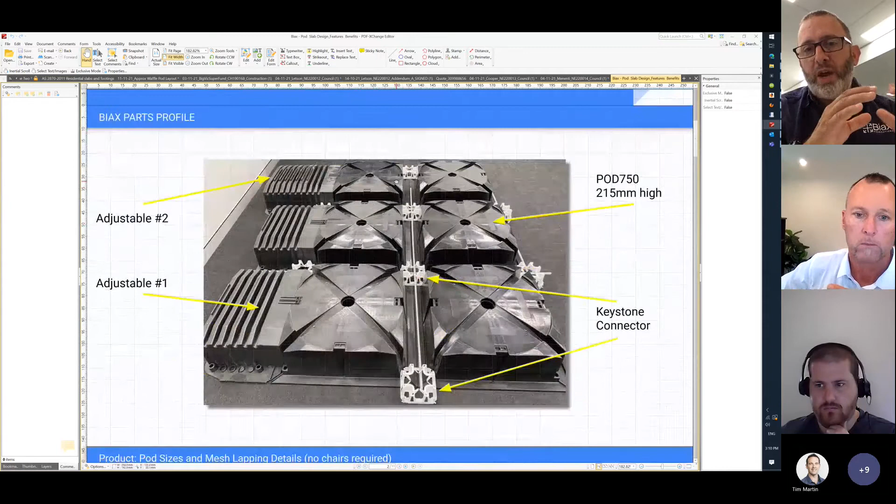That reinforcing profile, unlike waffle pods where we've got to follow a recipe that tells us when you get to here you've got to use these pieces of Rio, because the Biax is designed bespoke every single time with our software, it is absolutely common for an H2 or H2D slab to still use the same Rio that's in our M.

So on that basis, that means H2 will end up cheaper than your waffle alternative. But on your M, you've got more concrete because our rib centres are closer, and we're not getting those concessions of things like rio details coming down. So there is a slight offset there.

So you're saying if you're looking at it purely from a cost perspective, which I'd suggest is the main motivation for the builders on this webinar, that they're going to be looking at a biax on H sites and pods on M sites. Is that what you're saying? Yeah, that's it. So my dialogue with builders is, okay, if your motivation is 100% every individual slab being no more than X amount, then bin the M's, because if you're doing pretty rudimentary M's, this is going to be 7 or 8% dearer.

And Shane, that bears out in the numbers you're looking at. Correct. Yeah, as you rightly pointed out, the ribs are closer together, and the shape of the pod means the ribs are actually about 130 wide on average rather than 110. So it's a more costly unit piece.

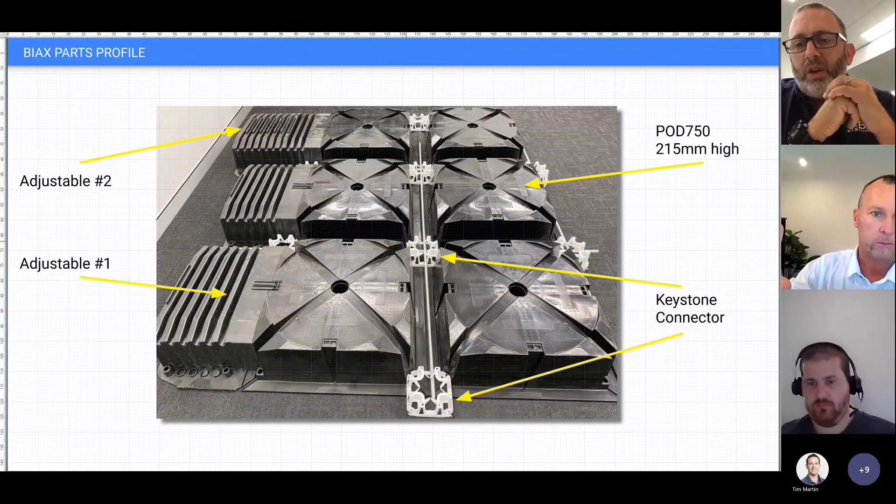It's Lego or IKEA, whatever you want to call it. 16-year-olds could do it, as long as they can read the start point and put the right shape in the right spot. So you're not getting pushback from trades, Jim? No, mate. The two hardest to win over normally are engineers and concreters, and we've won them both over.

In terms of ticking boxes on the other benefit factors, Shane, what we might do is follow the process of the presentation. So those are the parts. If you just go back, these are the primary parts.

We have a pod. We have 2 pods, in fact. This one here is the 215. We also have a 145 mil high for a 70 mil step down for a wet area, a patio, a garage, whatever it might be. On the left-hand side you can see what we're calling adjustables, and the adjustable one clicks onto the pod itself and extends it by 400 mil. The adjustable 2 can take it from 400 out to 700, and then you're back to a full pod denomination.

Those 2 parts will be changed around March, where we get rid of the adjustable one that clicks to the pod, and we'll have a dedicated moulded half pod, or about a third size pod. I won't get into the reasons why, but it will significantly change the experience on site for the concreter, around the complexity of putting these together. It's still incredibly simple in this fashion, but we've made it even better.

The white connector is in the centre. We call that a keystone. The keystone has little prongs, and in the corner of every pod there is a hole. So when you lock that connector into all 4 holes, it pulls all the pods together. Your ribs are identical in size every single time, and it's all part of the proprietary method of keeping this whole thing locked together.

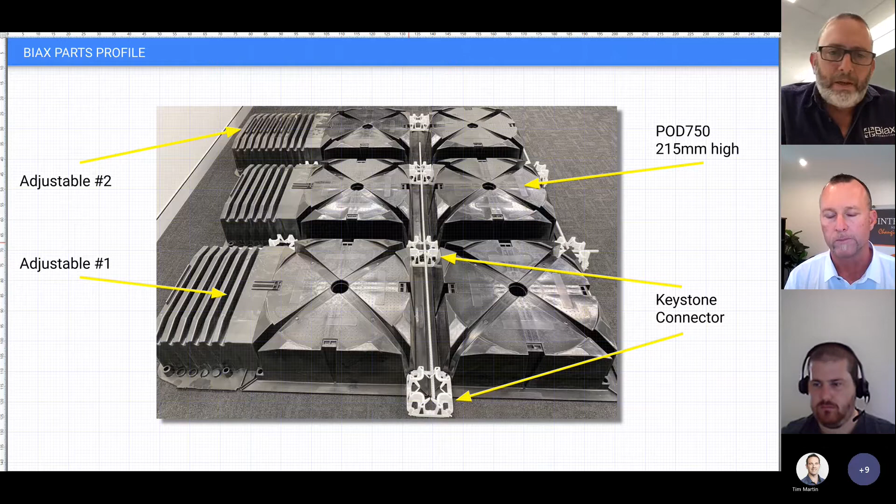Shane, if you want to go to the next page, we don't have to labour on this one. This is more just showing things like mesh lapping, but it's important to note little features such as the fact that the bar chairs are built into the pod. So there's another win for our labour.

The 215 pod on the bottom left-hand side, the chair is lower. It says 12 mil, it's about 14 mil.

I've got to say to people, other than the fact that the Biax system has ribs in both directions, everything you know about waffle pods, where the mesh should sit and what mesh and bar you use, just leave it at the door. We're not designing to the same recipes. In this case, the mesh is deliberately placed in the bottom of the slab profile. Structurally, it's still doing the job arguably better, but we get wins along the way with things such as your 4-way mesh lap, except when you might be using the smaller pod in a garage with 92 mesh. Might have a 4mm cover issue, but every other mesh type in every other circumstance, you don't have to cut the corners out, all that sort of stuff.

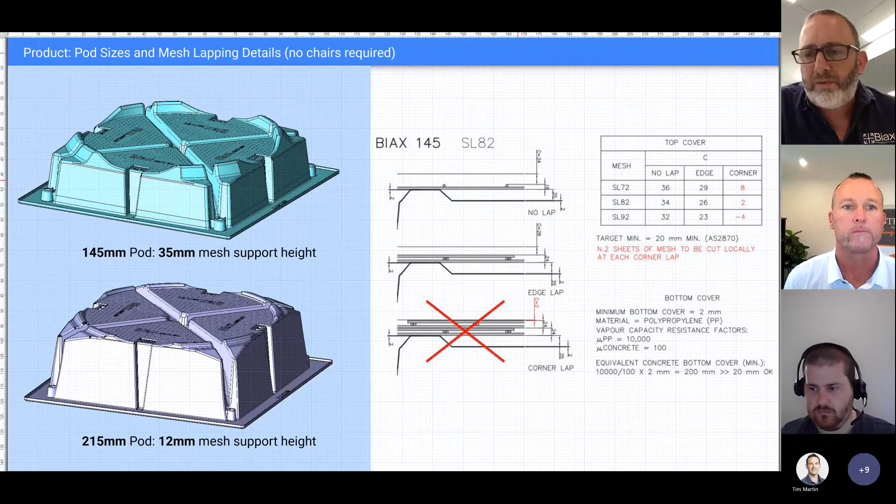We'll go to the next. I'm just conscious of time, Glenn, so I'm trying to rip through it. No, that's good, thank you. We only want an overview.

This part is what we're currently doing for pipes. There's a pipe that's coming through in the rib. If we've got a pipe in the rib, we need to leave space for an additional bar. We currently use the 2 adjustable pieces to make a mini pod. In March, it will be a dedicated moulded piece, much simpler.

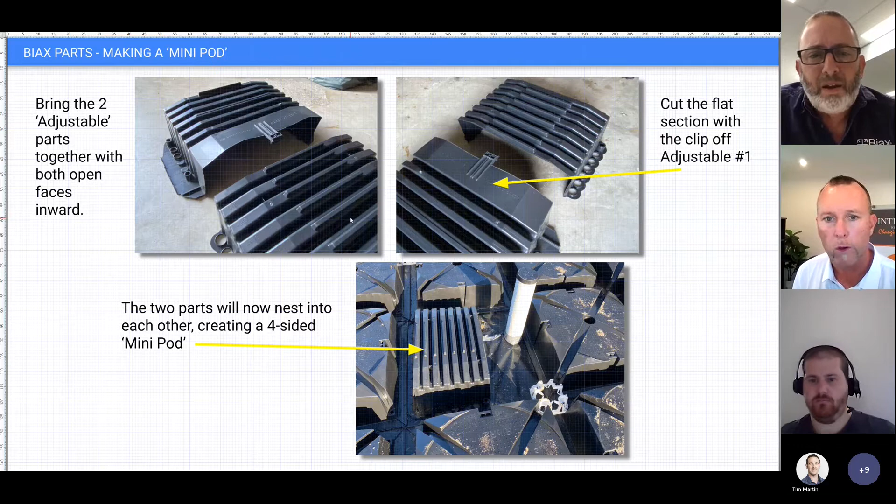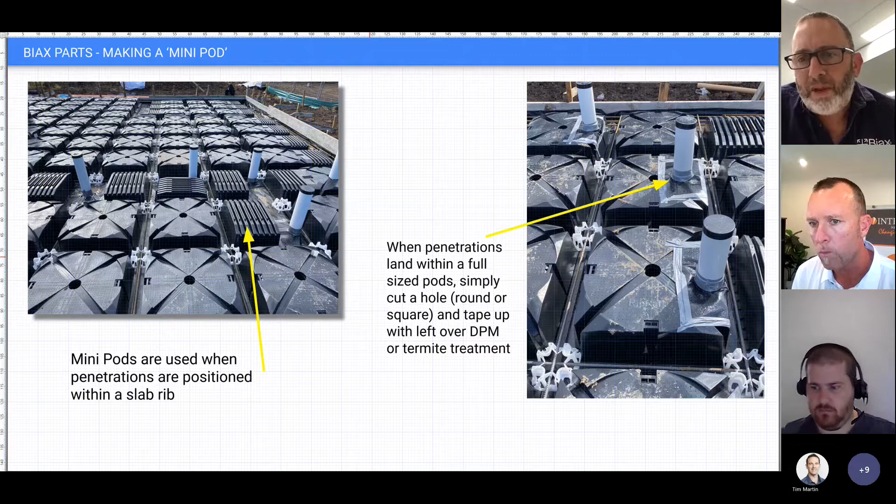Next page. If a pipe lands in a pod, on the right-hand side it's very simple. Just mark it, like they should be doing neatly with a waffle, cut a hole, slide it over, bit of plastic and tape, and Bob's your uncle.

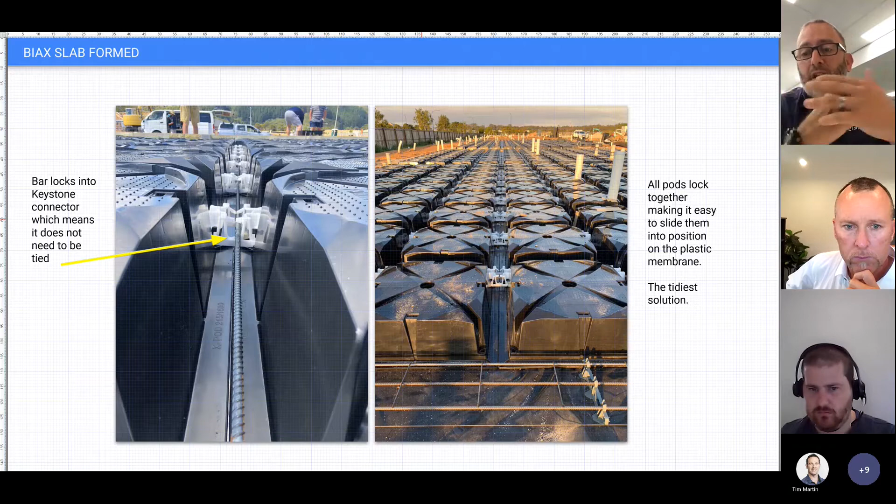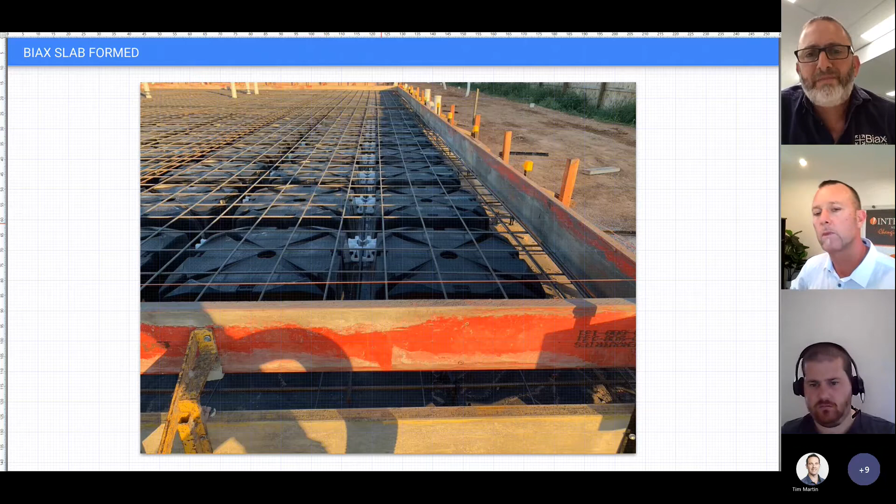Those rib steel bars lock into the keystone as well. So if you have an exceptionally unique and diligent concreter that ties their rib steel, which not many do, they no longer have to. The keystone locks the bar in. You just get your 600 mil lap, and that's it. Everything stays where it should. You can see on the right-hand picture, and in this picture with the mesh on top, it's incredibly neat. Your beams are straight.

It's an impressive thing to look at when it's done. Next page. Looks like it'd be a lot more stable to walk on too for us bigger gentlemen. Well, I did have a 142 kilogram Tongan the other day walk on a pod for the first time in 12 years, and by the end of it, he was skipping on them like a bloody lily pond. So he was having the time of his life. What a picture. Yeah, it was a hell of a mate. He made me hold his hand while he stepped onto it.

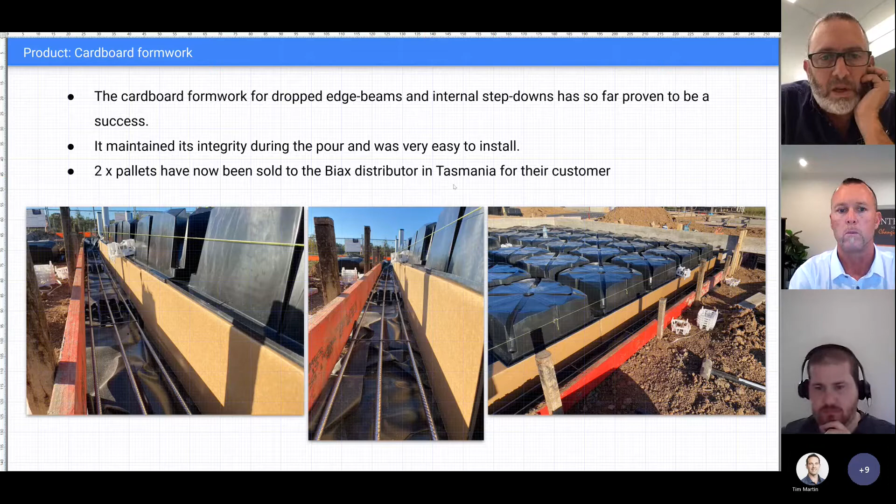It just screws into the base of the pod, drops down into the beam. It's very thick stuff. I don't know if you've ever been to a fruit market where you have the watermelons in the big cardboard bins, it's that stuff. So you can push against that and you can't bend it. It's certainly fit for purpose, but I wanted to try and get something a bit different. Next page, oh well, that's just another image of it.

So Shane, we were talking earlier about the gentleman in Inverell. This is how we might be able to do that sort of thing. But that's just a case of seeing is believing, if you like. Yes. I'm seeing lots of wins here, Jim. Yeah. It looks like a superior slab system, albeit maybe more costly on the S&M sites. Are there any drawbacks? What are the negatives?

Well, I'm a flashy sales guy at the end of the day, Glenn, so I'm going to say there's none. But honestly, we as a business had to invest a hell of a lot to bring this here and to continue it. And had anything not ticked a box, we probably still wouldn't have gone ahead with it. There were absolutely barriers at the beginning. There was no 145 pod. There was no guide or aid for an engineer to design a Biax slab because they can't design it using the waffle pod software. So we overcame those barriers over the last 2 or 3 years. So now drawbacks, I don't think there are any that are material enough to turn people off.

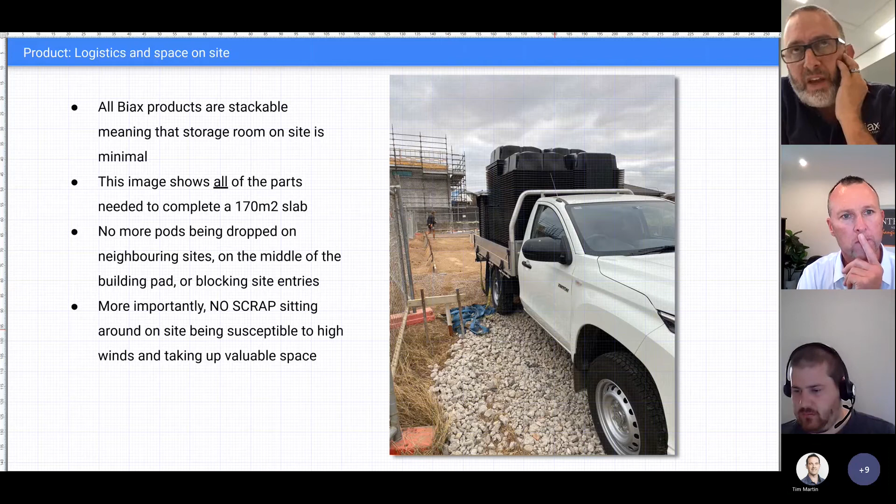If we can get that freight down to $200 per house lot, you're talking huge potential savings. I feel like this product is very, very fit for purpose for our regional builders on reactive sites, pretty much Central Coast and north. Shane, can I just interject, because Glenn, there was one omission from the discussion about cost, which is really pertinent to your members, and conveniently or not, it is actually directly linked to piling or piering.

So the way the design software works in the release we did last week, so the software's been used for a year. Intrax had it in place for a year, as others. Last week we released a new module where it now does the 3-dimensional finite element analysis, including a calculation for when you're piering. So if your members are often either partially piering around the perimeter of a slab or suspending it because they're on crappy soil, what the Biax system does deliver is a significant opportunity to space the piling out further and reduce piles.

We prototyped it in Sydney with a builder with 20 designs, and on average their piling costs came down by 15 to 20%. Wow. So trying to scrap over $1 a square metre for pods and steel is out the window. They were saving $2,000 just on piering. Okay. All right. Very good.